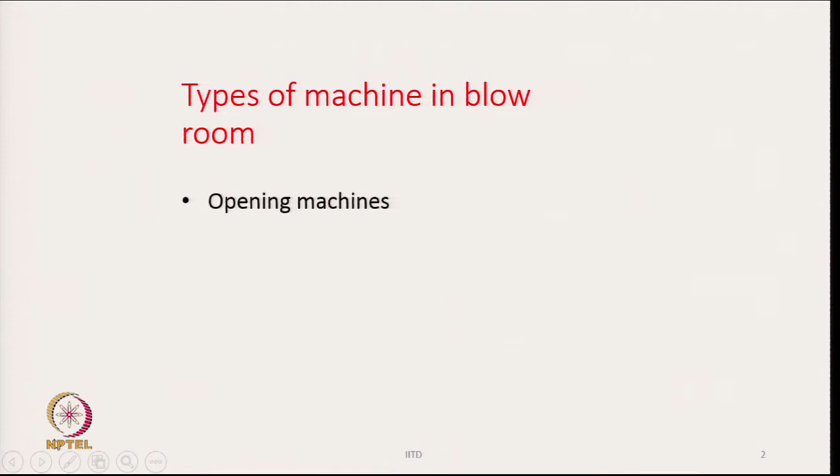Type of machines in blow room. First, opening machines are there, where the main job is to open out the tufts. There are two things about opening: one is breaking apart, that is, we break the bigger tuft into smaller ones, or we increase the volume of the tufts. Both are happening. Also, a third possibility could be a change in shape of the tufts.

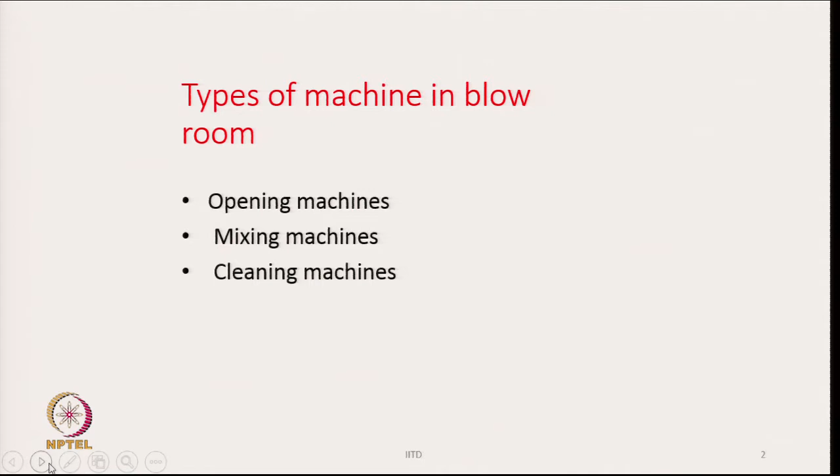So we have opening machines, then mixing machines where we mix the fibers, then cleaning machines in the blow room line, and we have dust removing equipment also. So these are the types of machines in the blow room. The blow room is not a single machine, there is a set of machines linked together, and broadly we can classify them into 4 groups: opening, mixing, cleaning, and dust removing machines.

Now, before we take up those machines, let us first try to understand some general considerations regarding opening and cleaning. Opening and cleaning, these two generally go together.

Opening of a cotton tuft by a single machine to the desired level is not advisable, as it will lead to considerable stress on fibers, leading to damage. If we try to open or break a large chunk of fiber into a very small size tuft in one step, there will be a tremendous amount of stress acting on the fibers, and the fibers may get damaged. Therefore, this should not be tried, and hence it is not done.

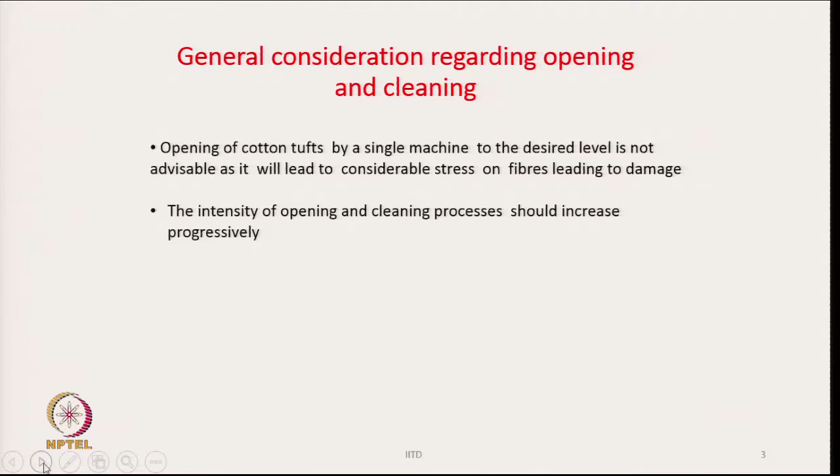Initial machines have to act on large compressed tufts and hence should be gentle in nature, because when the tufts come in the form of a bale, there is a lot of pressure on them and the density of the tuft is quite high. Therefore, aggressive action should not take place on these compressed tufts. Initially it should be gentle in nature.

Dirt can be removed from the tuft surface, that we have to remember. If the trash particle is inside the tuft, we will not be able to remove it, it will remain trapped. So only the particles which are on the surface of a tuft can be removed.

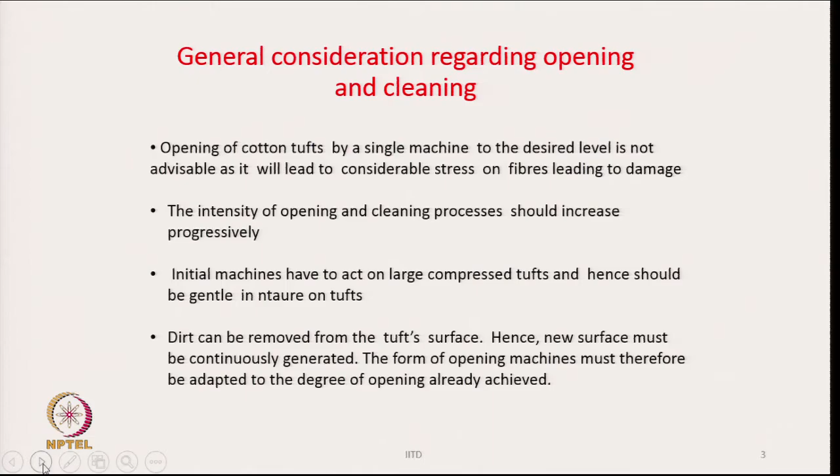Hence, new surfaces must be continuously generated. The form of the opening machine must therefore be adapted to the degree of opening already achieved. So the machine should be designed in such a way that it will keep on generating new surfaces.

Whenever I break a tuft into two pieces, I generate two new surfaces. We have to see that as the tuft goes from one machine to another, we must generate lots of new surfaces, because the trash particles are available on the surface of the tuft, and only then can these particles be liberated and removed easily. So this is important.

The other thing is, newly created surface should be cleaned as fast as possible, so that dust does not redeposit on the tufts—dust meaning not only dust, but trash also. This means each opening step should be followed by a cleaning step without intervening transport, that means opening and cleaning should go together. Otherwise, as I have told, there is a chance of remixing.

The degree of cleaning is linearly dependent on the degree of opening. This is also important: if the opening is better, that means I have generated a lot of new surfaces, and therefore there is a chance of better cleaning.

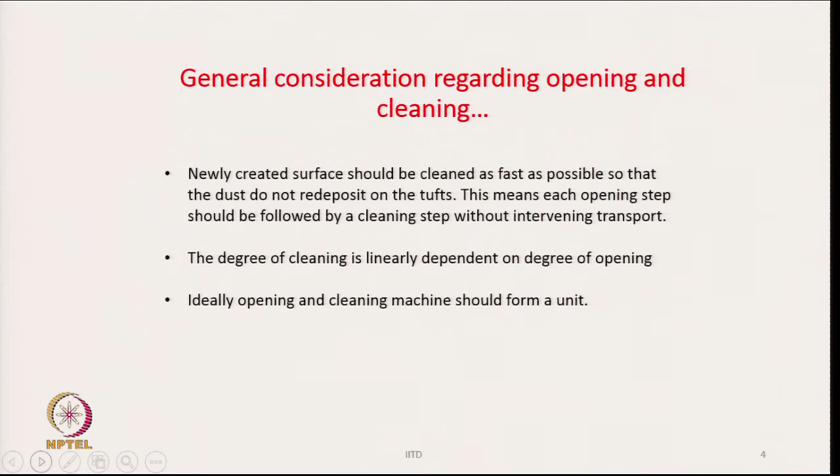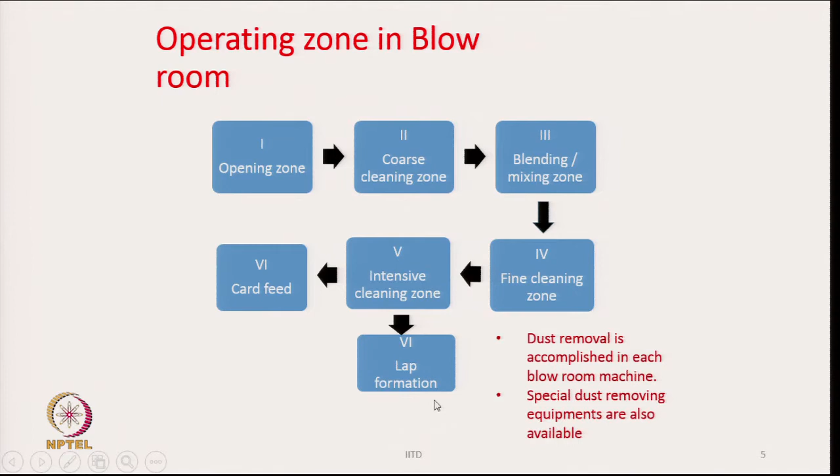So the entire line consists of these zones: opening, then cleaning, then blending or mixing if we want, followed by fine cleaning and intensive cleaning—or it could be just one of them, this is possible. After that, either we should go for lap formation or feeding of the material, that is, card feed arrangement.

Dust removal is accomplished in each blow room machine to some extent, because every time we are handling the tufts, there is a scope for the dust to be liberated also, other than the trash particles. So inside the machines, if we look at it, we will find it is full of dust laden air, and hence if we keep the machine under negative pressure, by connecting the machine to a suction source,

then this dust laden air can be taken out. So a lot of dust can also be removed from each of those machines, and maintaining a negative pressure also helps in a way that from the environment the air will enter the machines. There is no way for the air to escape, the dust laden air will not escape to the outside of the machine. Hence the possibilities of contaminating the surrounding air will be less if the machines are kept under negative pressure, within the chamber of the machines.

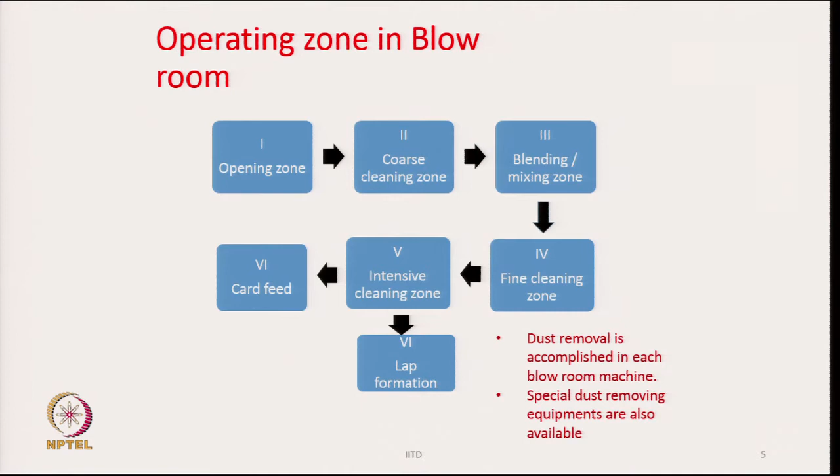So zone 1, we said this is basically the opening zone, and some of the machines used here are automatic bale opening machines, bale breakers, blenders - these are the machines which are used. We will learn about those machines in some other lecture, but these are the names of the machines in the opening zone, and their main function is to open the material gently.

So they should be very mild in action. The design of this machine should be such that they are very mild in action, opening up to smaller flocks without damaging the fibers, and forming flocks of equal size as far as possible. Flocks should be small - the smaller the flock size, the better it is - and blend material in the form of tufts right at the start of the process.

If we can blend or mix the tufts, that also is the objective here. So some kind of mixing also happens in these machines.

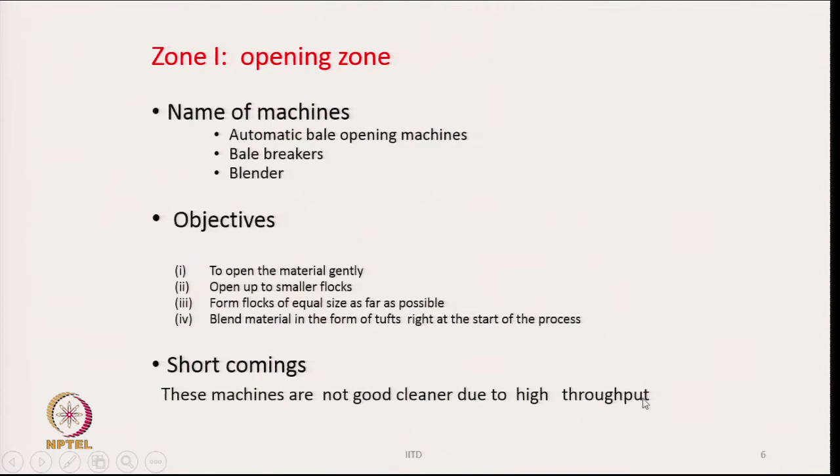The shortcomings are, these machines are not good cleaners due to very high throughput. They have been designed only to break a large chunk of material into smaller pieces. That is their main objective, and they are mild in nature as far as their opening action is concerned. Hence they will not be good cleaners.

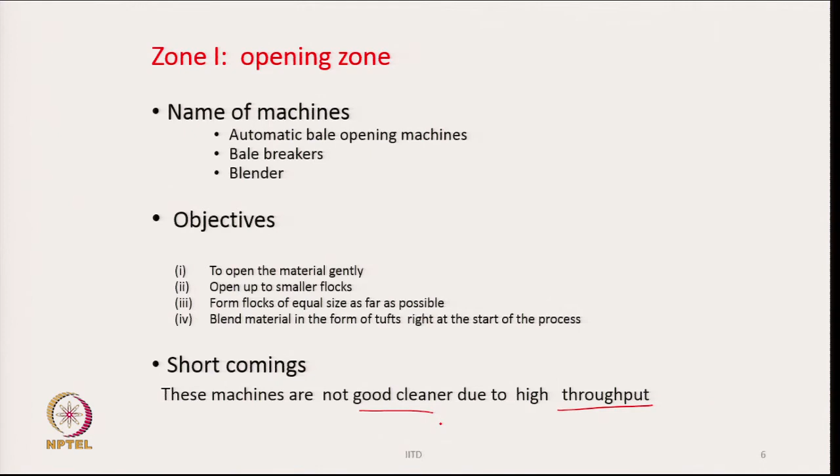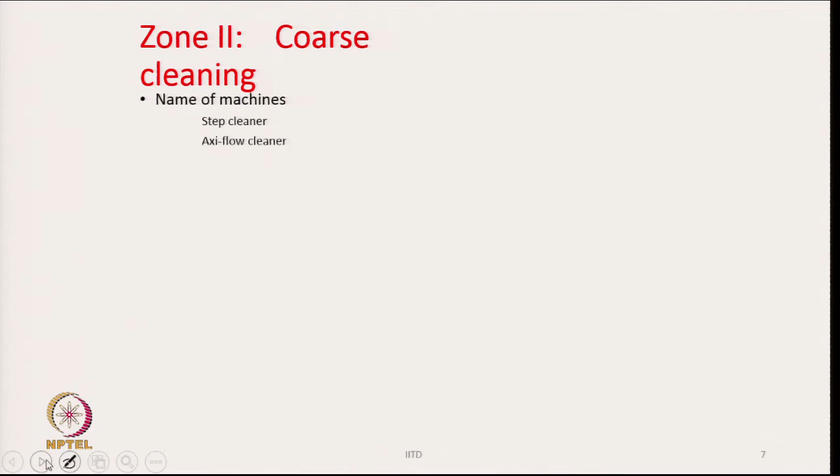The next set of machines are called coarse cleaning machines. The name itself shows that the cleaning is not very intense here, and the types of machine - their names are step cleaner, Axi-flow cleaner, monocylinder cleaner. These are some machines used in zone 2.

The objective is to clean the liberated trash generated by the previous machines. That is, the trash that has been liberated in the previous machine, by the bale opening equipments, when they are handling large tufts or large chunks of material, a lot of trash must have been liberated.

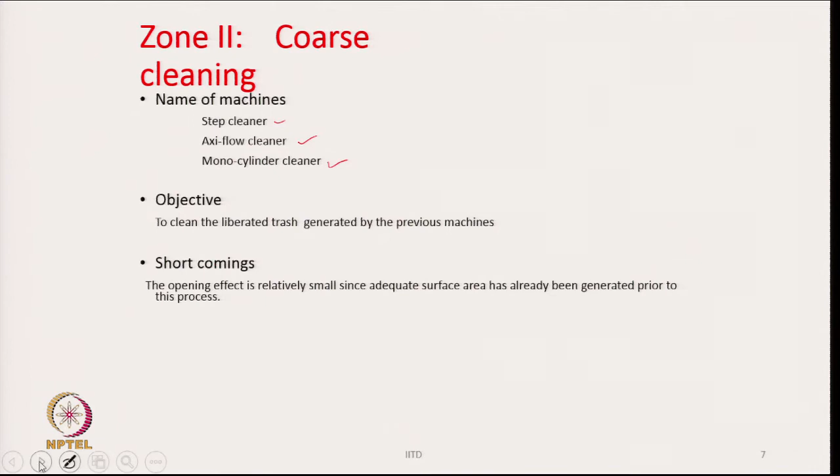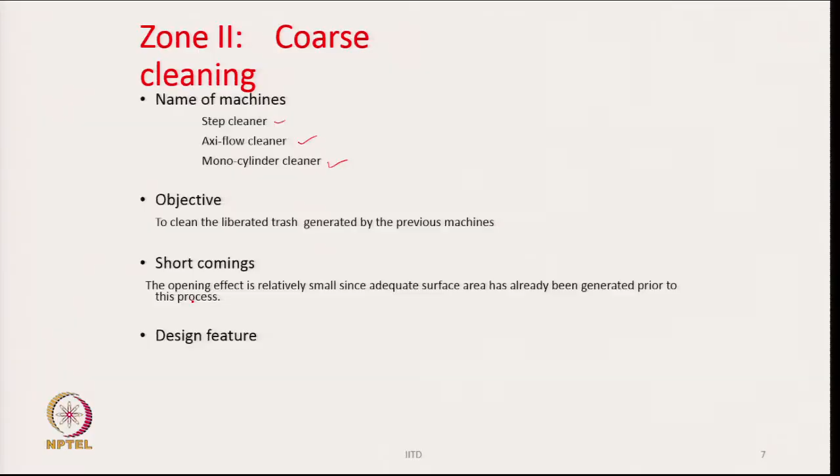Now in these machines we try to actually clean the tufts. The shortcoming of this machine is that the opening effect is relatively small, since adequate surface area has already been generated prior to this process. So in the previous process you have already broken the large tufts into small pieces. So here we do not really need very aggressive action on the tuft - our main purpose will be to clean the surface of the tufts. That is the main purpose, and accordingly these machines have been designed.

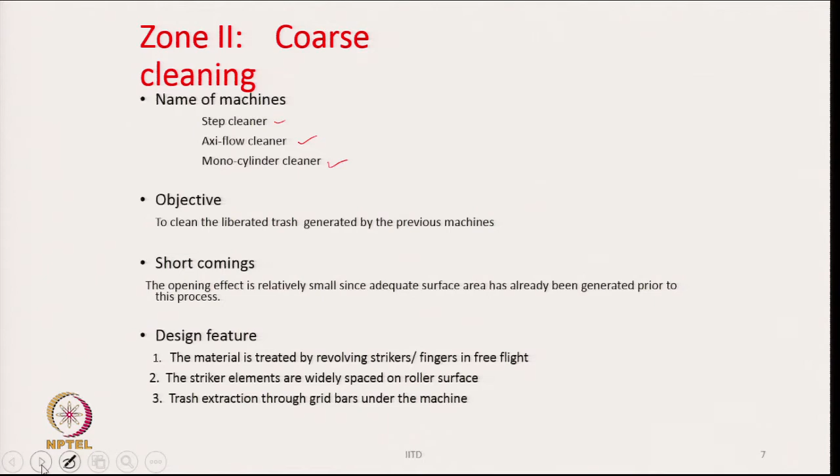So the design feature is that the material is treated by revolving strikers or fingers in free flight. The tufts are floating in air and the striking elements are hitting them, and that is how the machine works on the tufts. The striking elements are widely spaced on a revolving drum, and the trash is extracted through the grid bars under the machine. These are the common design features of these machines - step cleaner, Axi-flow cleaner or monocylinder cleaner. We will discuss these machines in future.

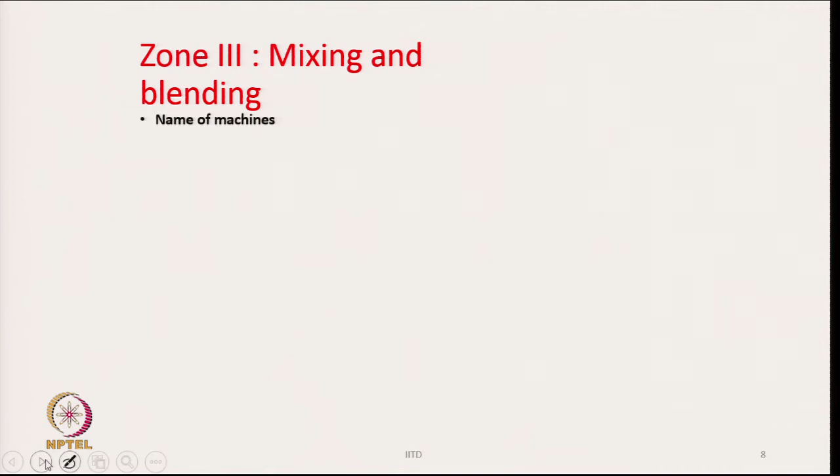From here we go to the mixing and blending machines, which is called zone 3. So once we have produced small tufts and cleaned them to some extent, now we want to mix these tufts, or if we want to blend, we can also blend them. Blending is done when the fibers are of two different natures.

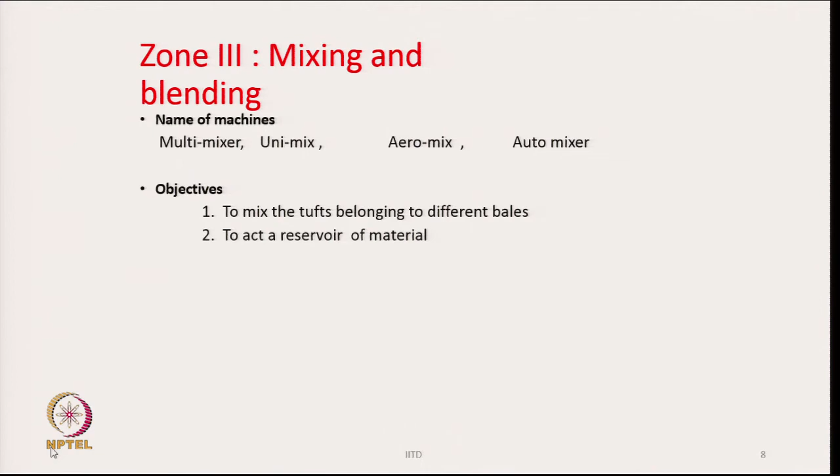Otherwise, if the fibers are similar in nature, then we call it a mixing process. The machines used are multi-mixer, unimix, aeromix. Different companies have given different names, but the basic principle of working is the same, and we will study this in some other lecture. The objective of these machines is to mix the tufts belonging to different bales, so that there is a consistency in the properties of the product we make, that is the yarn.

There will be some variation in the quality parameters of fibers coming from different bales, and if we can mix them properly, then the quality parameters of the yarn will be much more consistent. Hence mixing equipments are necessary in the blow room line.

They also act as a reservoir of material. This is also important, that we store the material within this. So they also act as a reservoir. We will discuss about them in more detail.

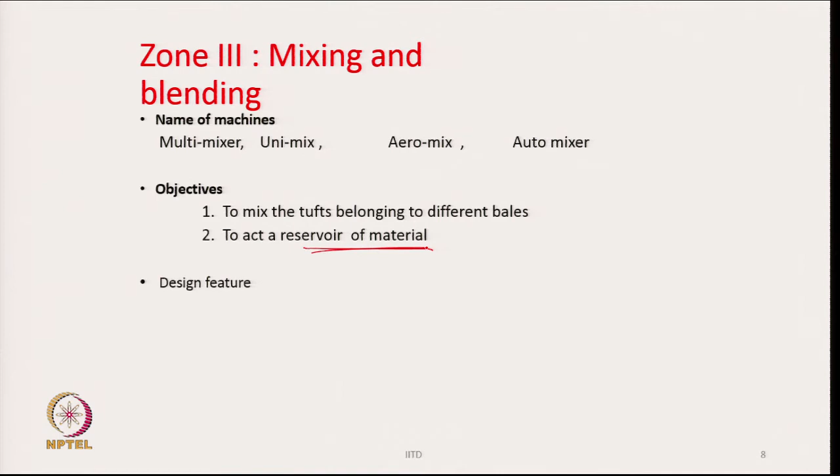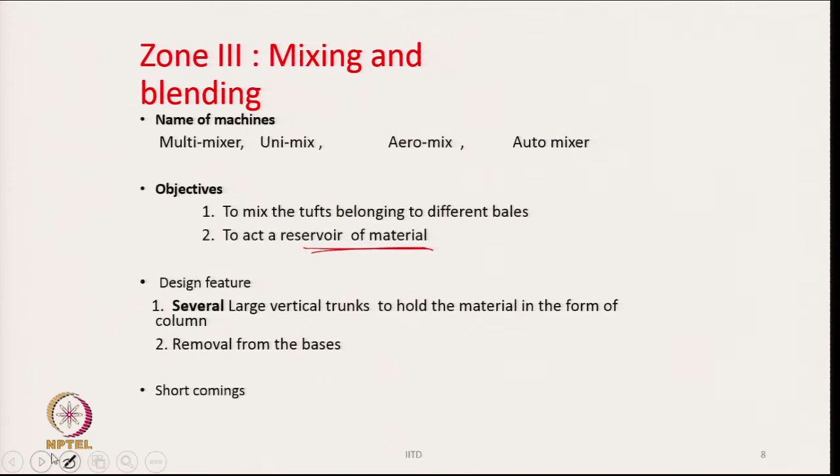So these two are the objectives, and if we look at the design features of these machines, several large vertical trunks or vertical chutes are there to hold the material in the form of a column, and we remove the material from the base. So we create vertical columns of material, maybe 6 columns or 8 columns, and then we remove the material from the base. This is the typical design feature of the machines.

The shortcoming is that there is no cleaning possibility here. These machines have been designed specifically for mixing purpose and to act as a reservoir of material. So there is no cleaning action, no opening action here. It acts as a storage space within the line, and at the same time it also tries to mix the tufts.

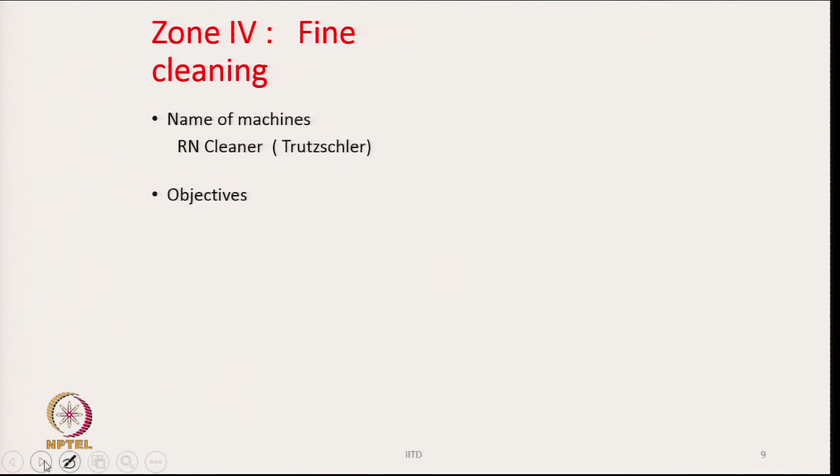Then zone 4 machines - one typical machine is RN cleaner, which we will also discuss. The objective is to create new surfaces of the tufts for further cleaning through vigorous opening action. So we have already cleaned the tufts in the coarse cleaning equipments. Now we are going to fine cleaning equipments. The name itself implies that these equipments should be designed in such a way that they will be a bit more aggressive on the tufts, so that we create new surfaces.

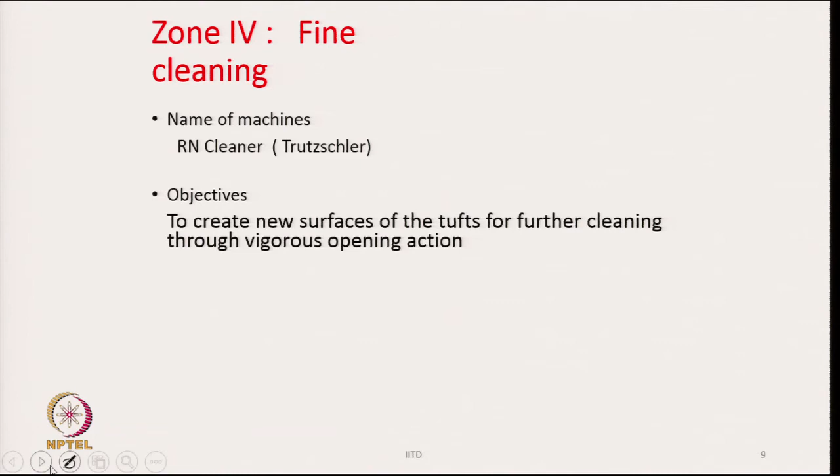Some cleaning has already been done. Now, if we want to clean it further, we have to create new surface and then clean it. So as the tufts become smaller and smaller in size, we have to be more and more aggressive on them in order to break them into pieces and thereby create new surfaces. Once we create a new surface, only then will the trash particles be exposed.

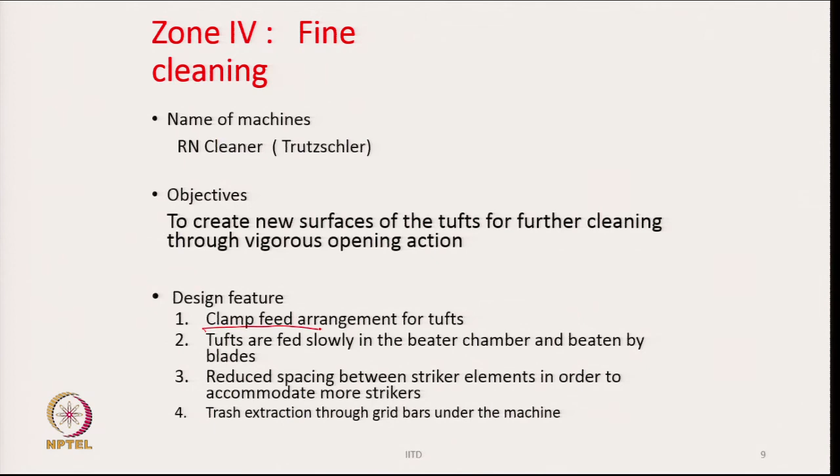So the design feature is that clamp feed arrangements are used in these machines. Tufts are fed slowly into the beater chamber and beaten by blades. There is reduced spacing between striker elements in order to accommodate more strikers. Trash is extracted through grid bars under the machine. This is the typical design feature of the machines used here. Always remember, this clamp feed is something very important.

Then comes intensive cleaning - these cleaning machines are much more intensive in nature than the previous ones. Sometimes zone 4 and zone 5 machines are the same, that is, some machines can act as just one zone. Instead of having separate zone 4 and zone 5 machines, we can have intensive cleaning units which will serve the purpose of fine cleaning and intensive cleaning both.

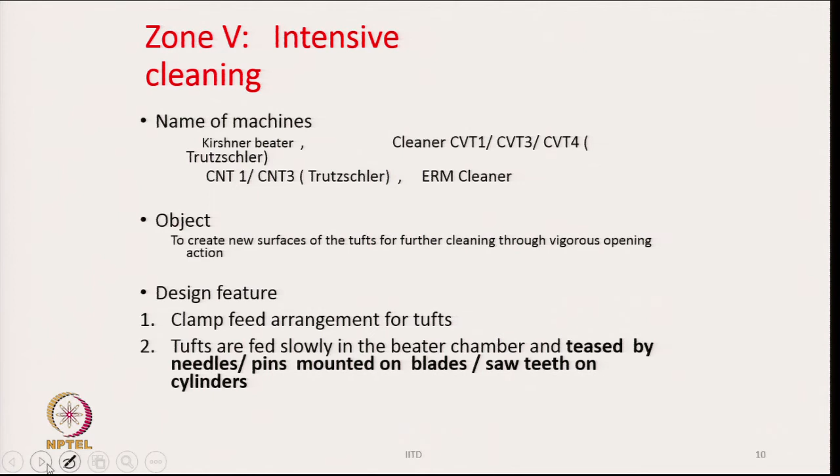They have a clamp feed arrangement for tufts, and sometimes they may have a pedal feed arrangement also - both are available. Tufts are fed slowly into the beater chamber and teased by needles, pins, blades, or saw teeth.

So now, as we want intensive cleaning actions, two things are changing. One is the way we grip the material, where a clamp feed or sometimes a pedal feed could be used, or both are possible. The idea is that we should be able to grip the tufts properly, so that they do not slip from the nipping point. The nipping point has to be made more and more powerful, otherwise the tufts may slip.

The second thing is that the striking elements have to be smaller in size, because the tufts have become smaller now. So if we have to break those tufts further, we should think of going for a kind of teasing action - we have discussed teasing action earlier. So for teasing action, we need either needles, pins, or saw teeth.

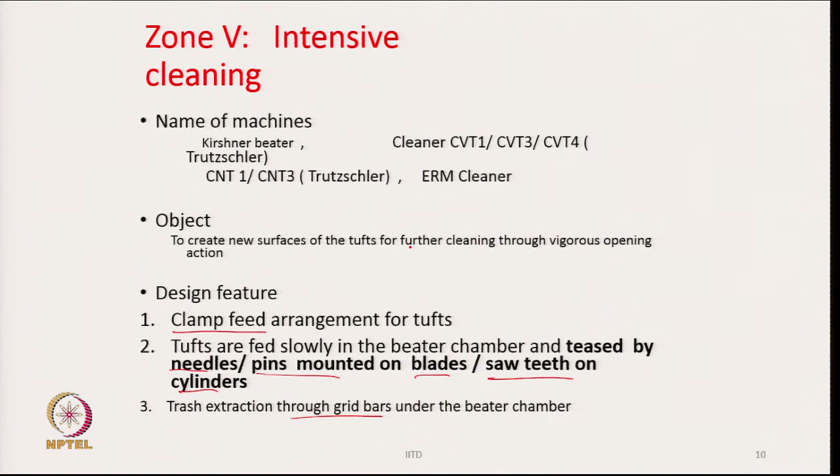This is what is required. So, all these cleaners that we will see will be having such kind of striking elements on their surface, and the trash is always extracted through the grid bars under the beater chamber. It will create new surfaces for further cleaning through very vigorous opening actions. So, as we start with very large tufts, we break them, make them a little smaller, clean them, mix them, again make them smaller. This is how the process is carried out.

And the last zone is card feed zones, that is, we have to now clean the tufts in the blowroom. Now, these have become relatively clean tufts which are small in size, and now they are suitable. If we have to go for further cleaning, we have to go to a different machine, and the name of that machine is carding machine. So, you will learn about the carding machine also in this course.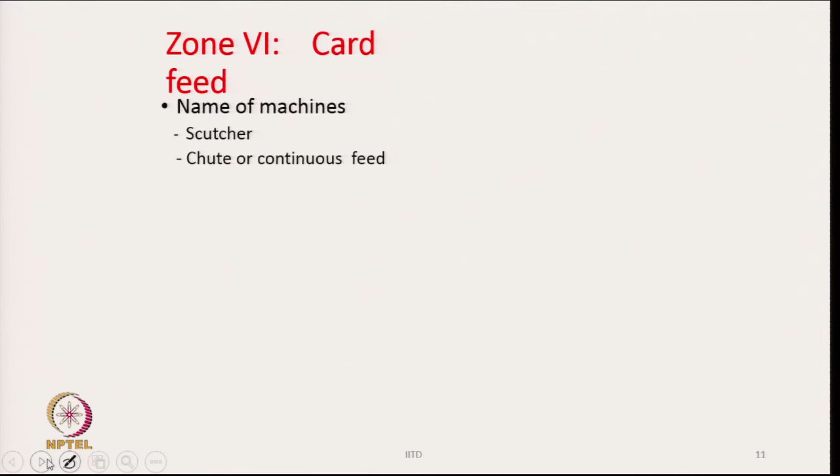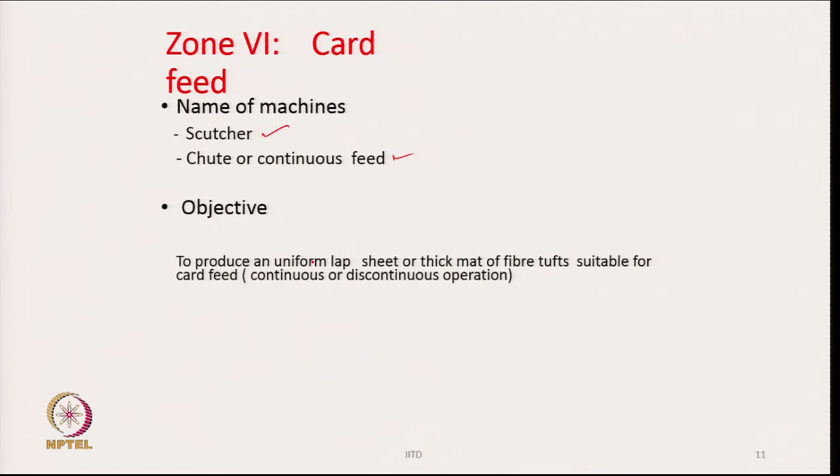So, now the card feed arrangements: there are two types of machines. One is called scutcher, another one is chute feed or continuous feed. So, now the scutcher, what we do? We produce a uniform lap, or we have to produce a thick mat of fibers suitable for card feed. A lap is basically a thick sheet of cotton tufts of a certain length, which is suitable for feeding to carding machines. So, this is an old practice where the scutcher used to be there and used to form these laps.

Most of the time the blowrooms will be directly connected through a chute feed system to the carding machines. So, a set of cards will be connected to the blowroom, so that we can continuously feed the tufts to the carding machine. So, it is also known as chute feed system or continuous feed system.

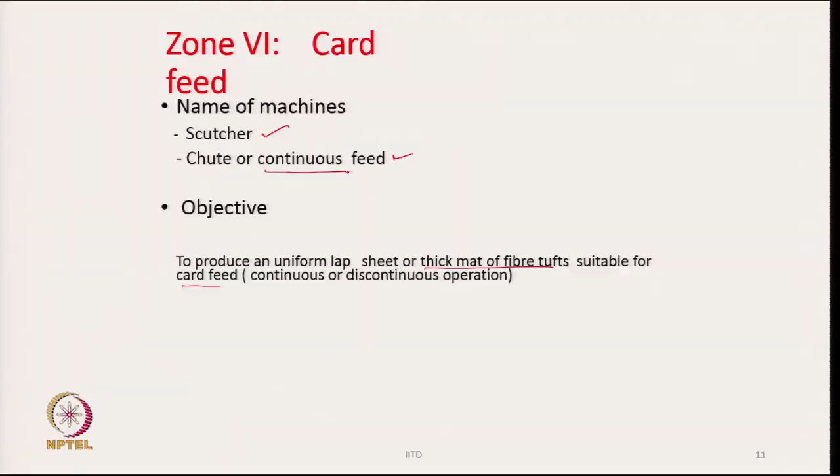Lap feed is discontinuous in nature, because you produce the laps, we will learn about them in more detail, and the laps are stored, and then the laps are transported to the carding machines, and then the laps are put on the carding machine. So, basically the scutcher is used to produce laps, and this process is a discontinuous process. Whereas, if I connect the blowroom directly to the carding machines, we say it is a chute feed system or continuous feed system, and it is a continuous operation.

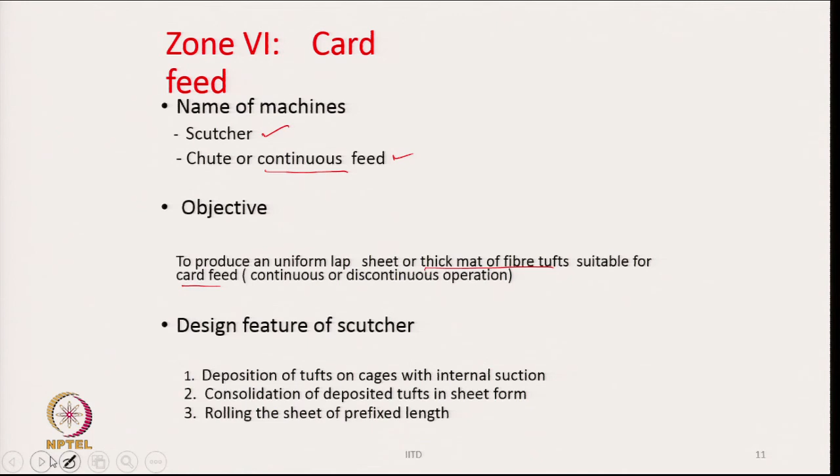Now, a design feature of the scutcher is the deposition of the tufts on cages with internal suction, and as I deposit the tufts on the cage, it becomes a sheet. Then consolidation of the deposited tufts in the sheet form. The sheet has already formed because tufts are coming and falling on a cage. A cage is basically a perforated drum. We will learn about them in more detail, and then it has to be consolidated, otherwise it is very floppy.

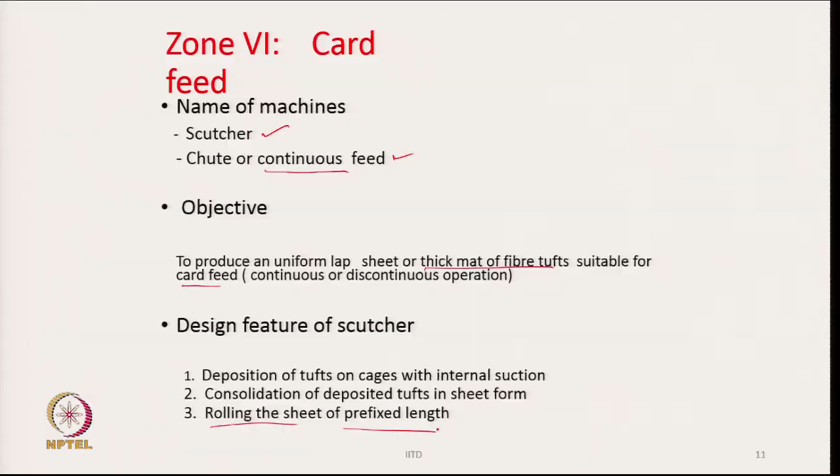So, we have to compress it and then roll the sheet to a particular prefixed length, and it becomes cylindrical in shape. That is what the design feature of the scutcher is like.

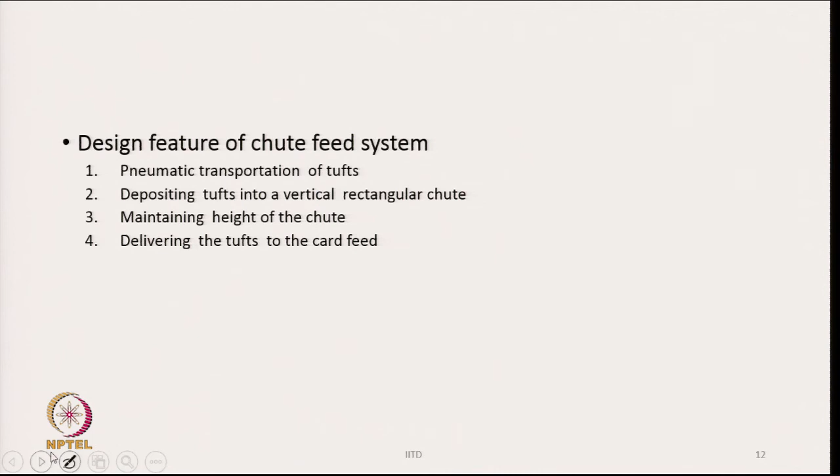And in the chute feed system, we have pneumatic transportation of tufts, then deposition of the tufts into a vertical rectangular chute, maintaining the height of the tufts in the chute. We are basically making a column of tufts behind the carding machines. So, in these columns we are depositing the tufts, and a vertical column of tufts is created, then delivering the tufts to the card feed system.

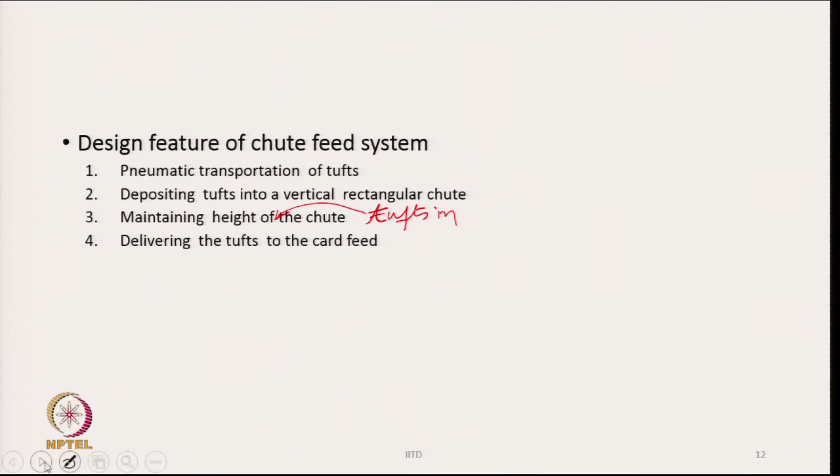So, from that chute where there is a column of tufts, we have to now feed this column of tufts to the card feed system. That is the design feature of the chute feed system, and we will learn about them in more detail. So, these are the different zones. There are 6 zones we have discussed here.

The other thing which is there in the blowroom line is dust removal. The names of the machines are dust extractor, and all the cages which are there can also remove some dust. Then there are separate dust removers. They have been specifically designed to remove dust from the tufts. The design feature is separating particles directly from the fiber surface by suction or by scraping. That is how dust particles are separated from the fiber surface, mostly by suction system.

So, whenever the material is rolled or beaten or thrown out, the dust particles are released and they are sucked away by some suction system. Releasing dust into the air and then removal of dust laden air. The other thing could be that we release the dust into the air and then remove the dust from the dust laden air. We will discuss this type of machines.

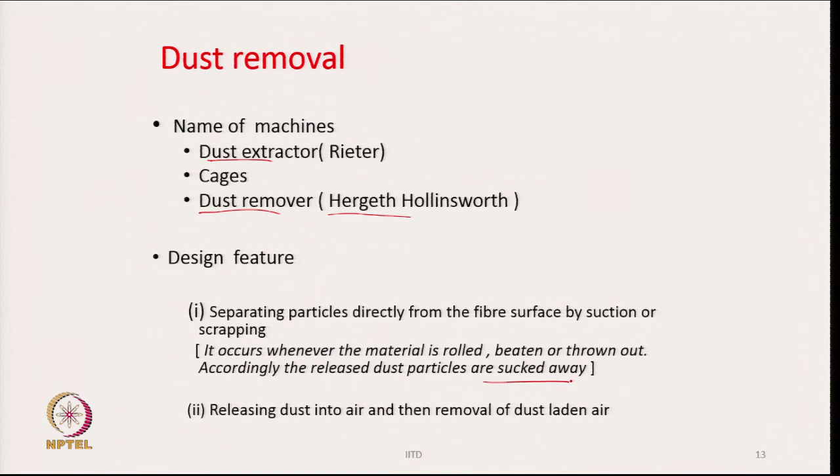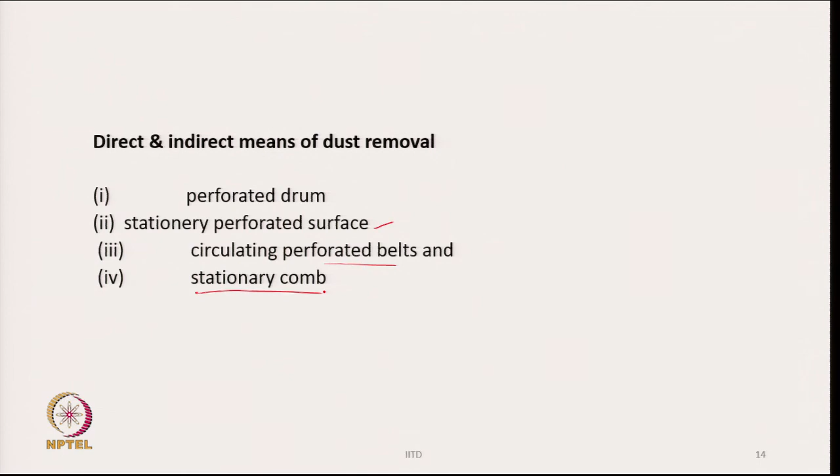The direct or indirect means of dust removal is by using a perforated drum, stationary perforated surface, circulating perforated belt, or stationary comb. All of them will liberate the dust particles and also will be able to suck them out. So, whenever we have to deal with the dust only, the dust being very small in size, it is difficult to remove. So, we have to have controlled suction, and we have to also see how to liberate them.

For liberation, we need some kind of friction between the fiber and metallic surface, and once they are liberated, they have to be sucked away with the help of controlled suction.